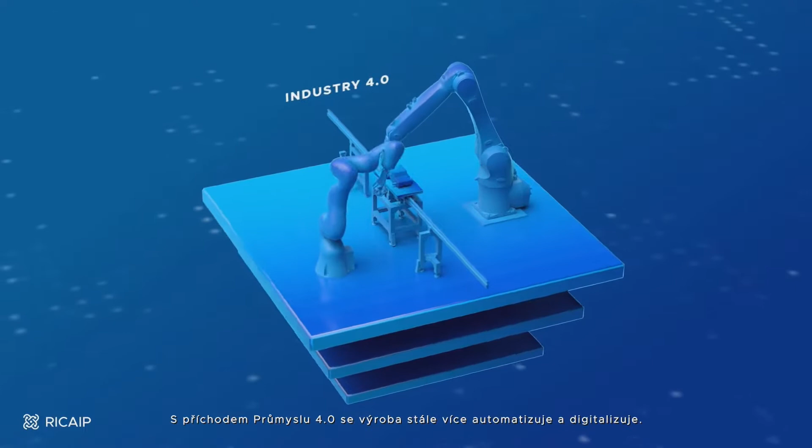The arrival of Industry 4.0 means production is becoming increasingly automated and digitalized. Although companies often have their own proprietary solutions, they're typically not standardized, so manufacturing continues to take place in independent and unconnected units of various size.

Two Czech and two German research institutes have joined forces in the creation of a project for new intelligent, secure, and sophisticated solutions for distributed manufacturing in the Industry 4.0 environment. The collective effort led to the establishment of RICAIP, the Research and Innovation Centre on Advanced Industrial Production.

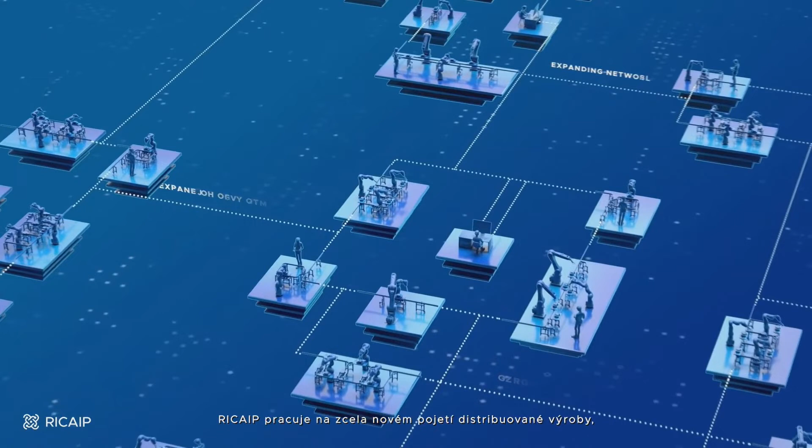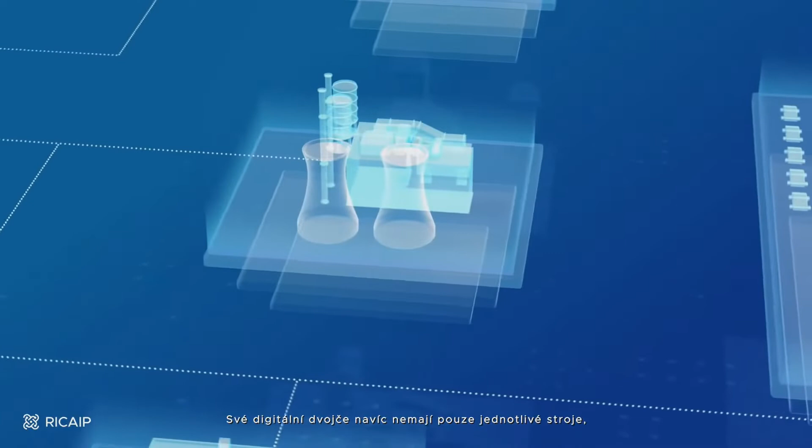RICAIP primarily focuses on developing an entirely new concept of multi-site production in which each machine has a digital twin that reflects its characteristics and communicates with other digital twins. Digital twins aren't used only for individual machines; entire manufacturing units and other entities involved in production can have them too.

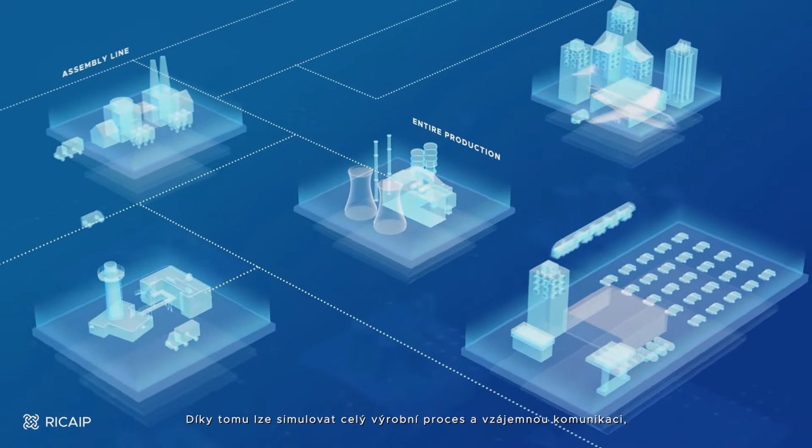This makes it possible to simulate the entire production process and reciprocal communication, thus significantly accelerating production preparation while eliminating the occurrence of errors. Thanks to artificial intelligence, manufacturing units are able to share knowledge with one another, and the system can optimize production and respond quickly to constantly changing environments.

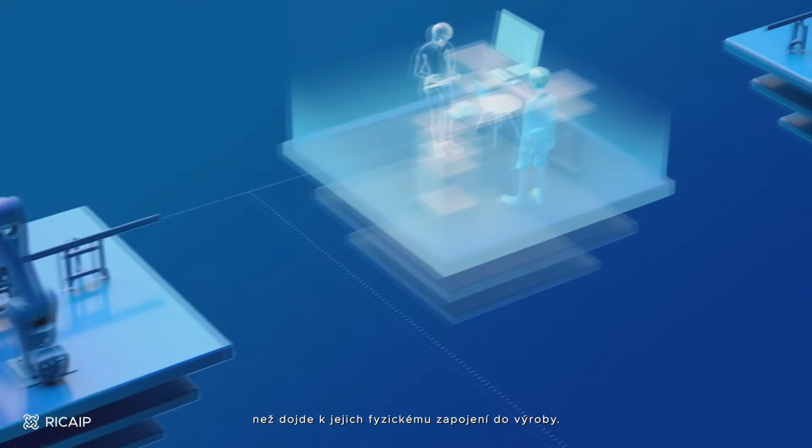Moreover, the combination of virtual reality and augmented reality allows additional virtual devices to be introduced to the production process and tested prior to their physical implementation on the shop floor. Likewise, potential new suppliers can enter the process, as well as the customer, who can configure the parameters of the required product and make other changes if necessary, even at the last minute.

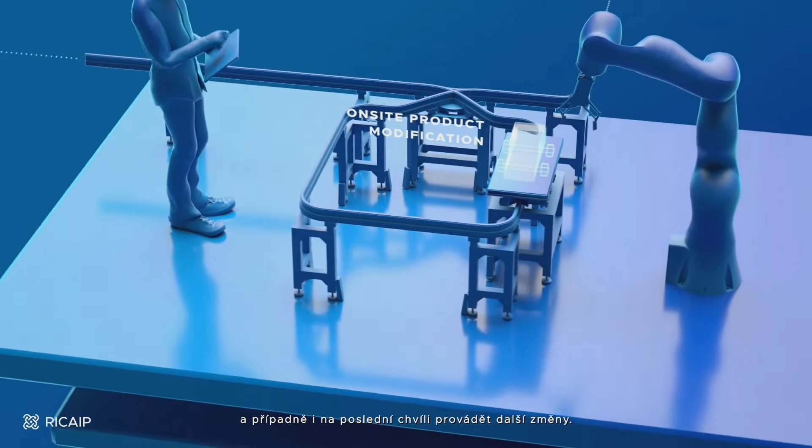These are the principles upon which future automated multi-site production networks will be built, and upon which they will accelerate the implementation of new manufacturing processes, reduce production costs, and make it easier for companies to enter the market and value chains.

Production as a service and shared resources: this is the future of industrial manufacturing.

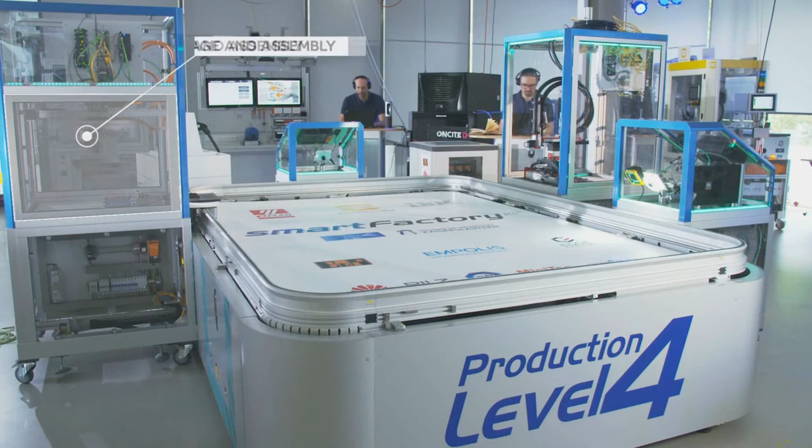The demonstrator features various production capabilities due to its modular design. We have included four new core elements in our system: a module exchange with automated release, adaptive AI methods based on deep neural networks, a Gaia-X connection, as well as a modern scalable system architecture.

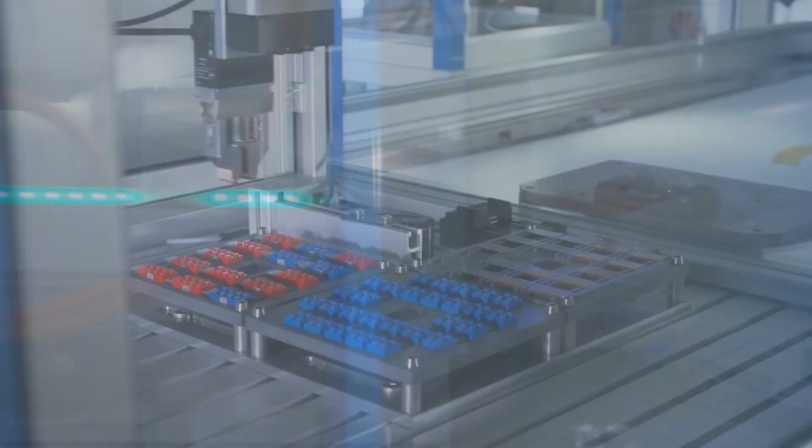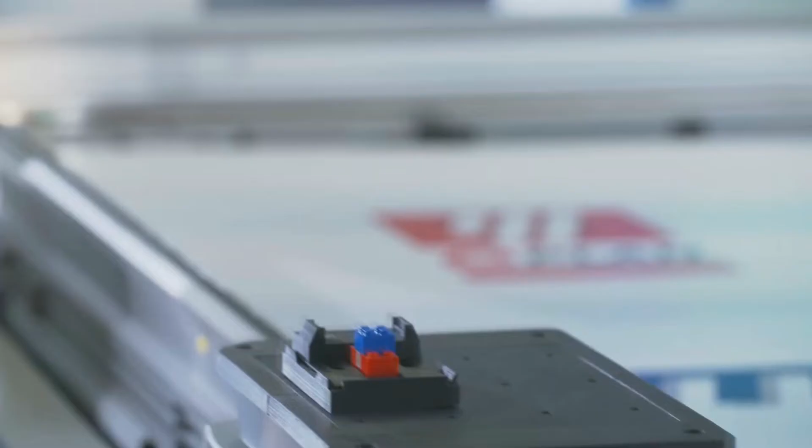We intentionally chose a simple product for the manufacturing process: a USB memory stick in the form of a studded brick that can be individually configured. The customer can select from various colors available. The brick is mounted as desired at the assembly station, then makes its way to the data entry station, where process and customer-related data is stored on it.

At the end of the line, the state of the final product is compared to the initial order using AI methods before the USB memory stick is output to the customer.

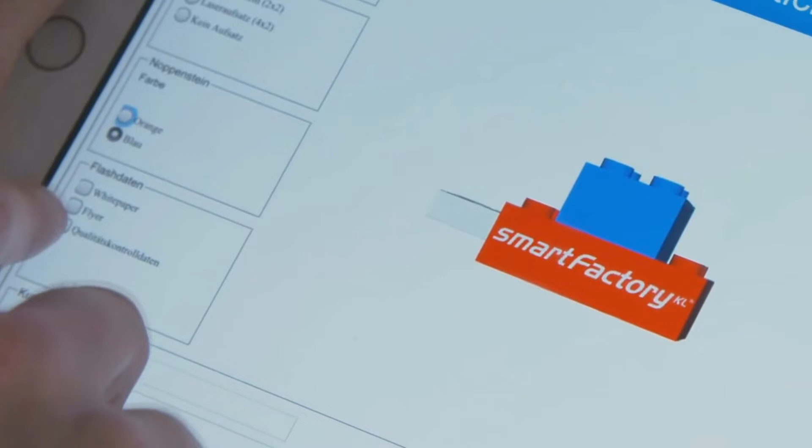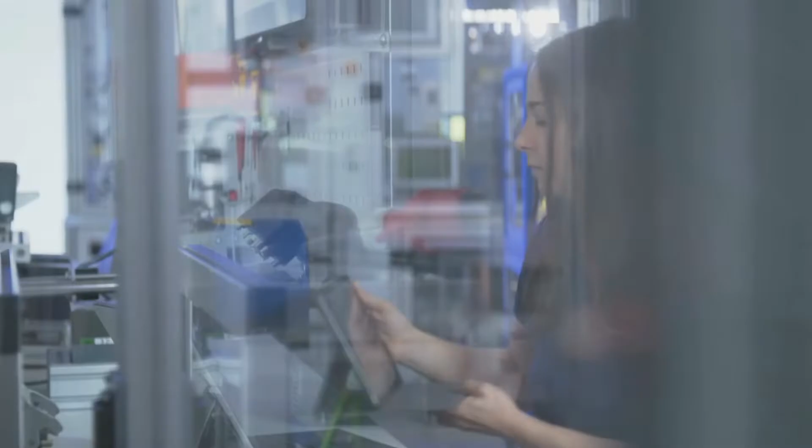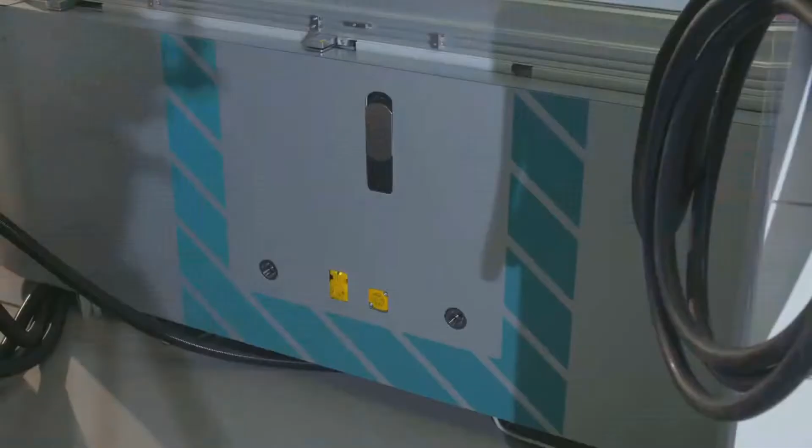An optional production photo is linked to the quality control data. This option requires a special module to be available in the system. A notice is displayed on the operator's tablet, and the operator gets instructions that this module must be installed in the plant. The tablet now displays detailed worker assistance that provides step-by-step guidance on how to proceed safely through the plug-and-produce process. Special positioning elements on the stations and plant system ensure proper alignment, while electromagnets guarantee stability and occupational safety.

Each work step must be manually confirmed before the process can continue. This helps to avoid safety issues.

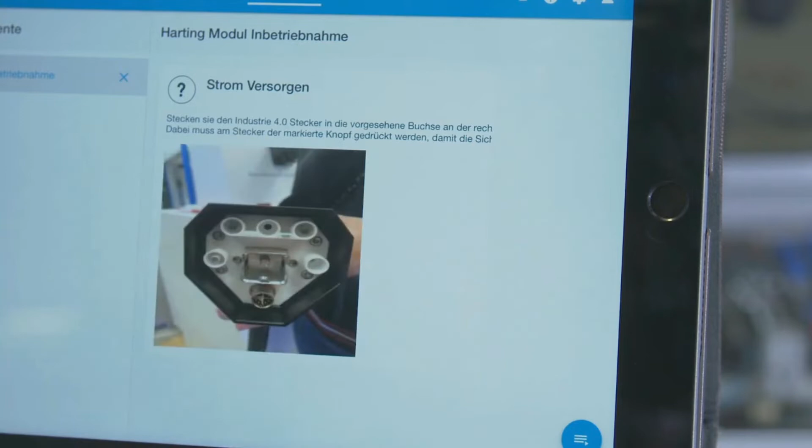An intelligent new connector was developed especially to meet the requirements of modular and autonomous production systems. In this form, it serves as a model for standardization.

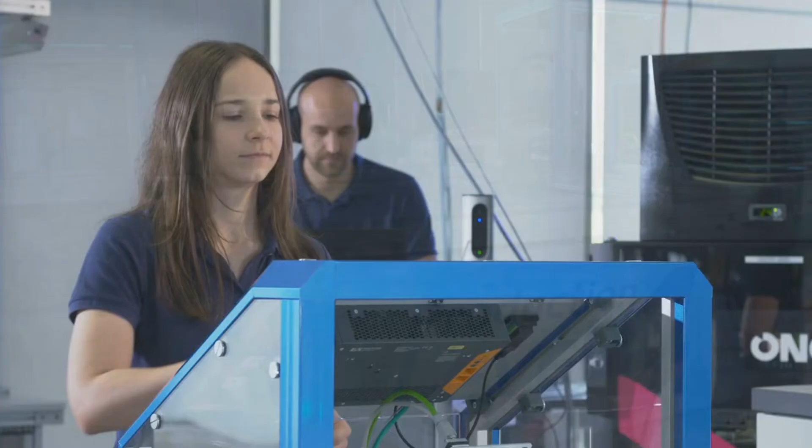Manual approvals lead the worker to a legally compliant plant operation. A certified and documented release is prepared at the end of each module exchange. The implemented security elements provide additional protection against unauthorized access.

The newly installed module enables the quality control and the related picture, which is later flashed on the USB memory stick.

The customer can also select options that require access to external suppliers. For example, we use the orange-colored studded bricks that can be ordered automatically via the European Gaia-X platform and delivered from the Netherlands. Via the Gaia-X node and connection, the production is triggered and the studded blocks are delivered and integrated into our system.

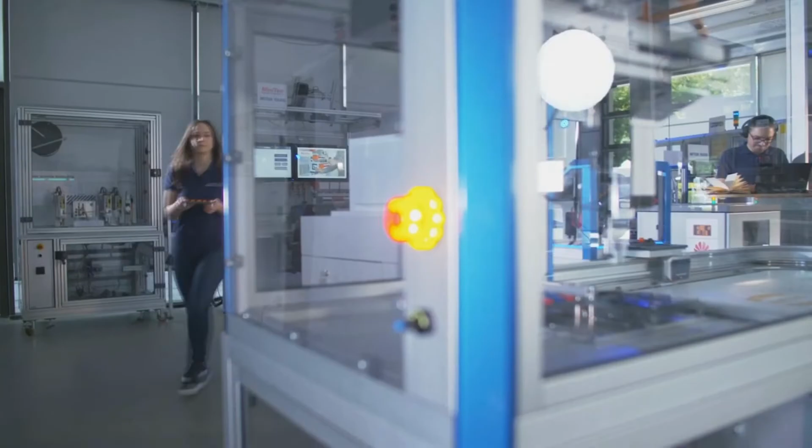On-site production is also possible, and the customer request can be fulfilled without a problem.

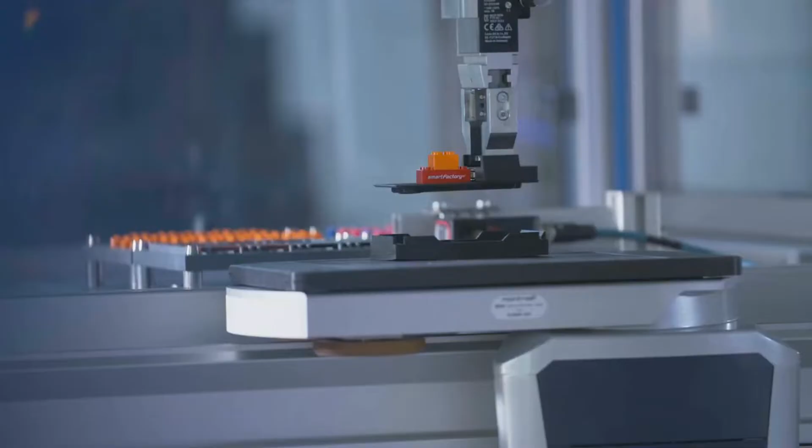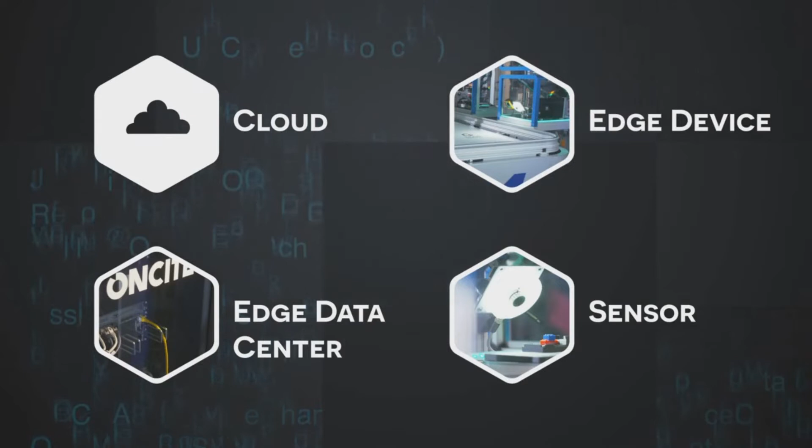Artificial intelligence is implemented throughout the plant. Why is this special? You can work at different levels: in the cloud, in an edge data center, directly on an edge device at the station, or directly on a sensor.

Another innovation is the skill-based system architecture. It manifests physical machine capabilities and product resources, as well as the higher-level software services for control, planning, and analysis in the factory environment. The automation pyramid transforms into a distributed network. Increased production flexibility is the result of agile expansion, made possible by the modular design.

Dr. Denner, the CEO of Bosch, clearly stated at the summit that only the combination of physical knowledge and digital data will drive the development of industrial artificial intelligence.

This is a great opportunity for Europe. Why? Because, of course, in the Czech Republic and in Germany, we have so many excellent engineers who have all this physical knowledge. And of course, we have to combine this with the AI data-based approach.

In the United States, this was also recognized in a new AI program launched by DARPA, which is called AI Next. Three waves of AI are included here, and the most recent one is not statistical learning, because this is now used and very successfully used, I must say, but they say also it should be combined with contextual reasoning.

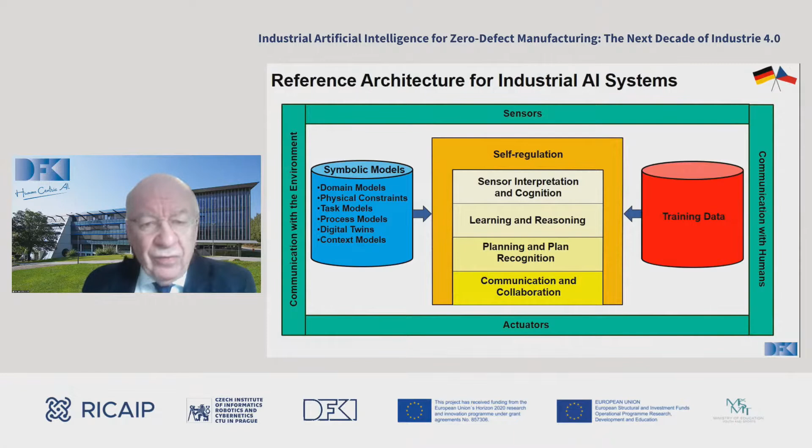On the other hand, the training data are also important. If we have excellent training data, which are annotated correctly and which have a high quality, then in combination we can ensure really a very good quality of the sensor interpretation, of the reasoning and learning, and the planning in the factory. So why do we want to combine machine learning and model-based inference?

These knowledge-free AI methods, like deep neural networks, which are very successful, we have to use them for visual analysis, for acoustic analysis, so the low-level sensory function of the brain and the cognitive apparatus of humans. These statistical methods can also be used to control search processes in model-based systems and thus make them much more efficient, or to learn the basic operators for model-based inference and planning procedures.

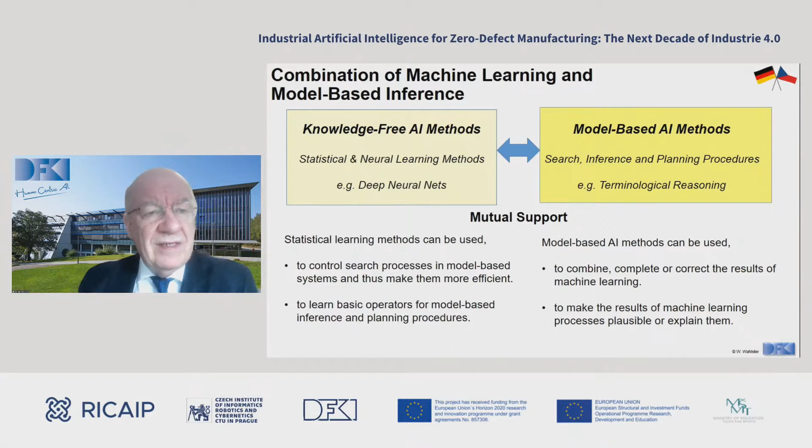On the other hand, we must use model-based AI methods to correct machine learning, because sometimes the machine learning results are wrong and they don't conform with physical knowledge. To make the results of machine learning also plausible or explainable, some models are also very important and useful. So we have this pendulum between symbolic and numeric.

We have very successful symbolic methods like multi-agent systems in the factory. You just saw this in the video. Use of knowledge graphs, constraint and SAT solvers, I will show in a minute. So many methods. On the other hand, of course, Bayesian networks, probabilistic logics, support vector machines, and reinforcement and deep learning are very important.

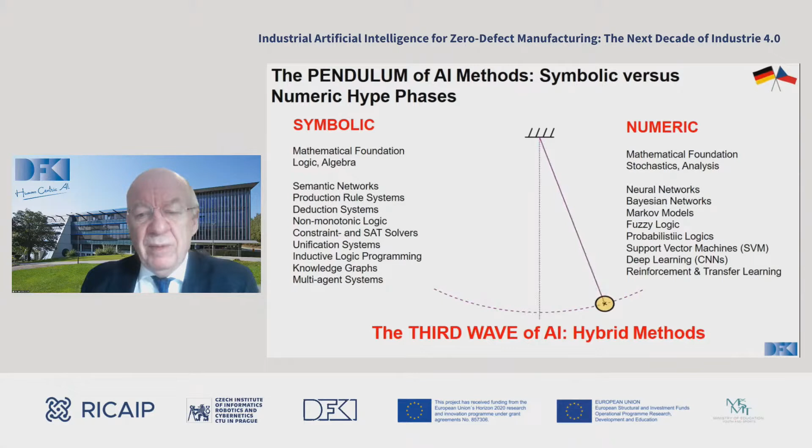And we discussed the next wave, how can we work together, and signed a contract. And we will have a new project, and this will be the technical part of my talk, namely AI-based quality management.

What does this mean? We want to achieve incremental real-time quality monitoring by a hybrid combination of statistical machine learning and symbolic models. And we want to generate alarms in the machining or assembly process as soon as we observe wrong actions by human workers or a robot, or a wrong interaction between humans or human and robots, or robot and robot in the factory. So one way to do this is hand tracking.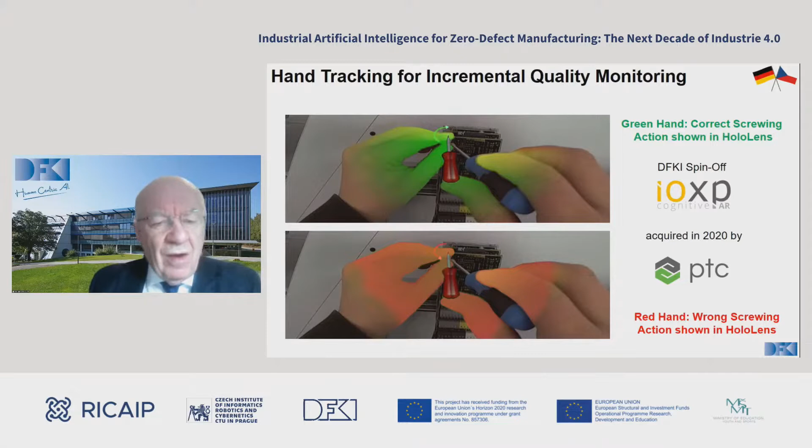We have now advanced methods for doing this. And if somebody does, for instance, a screwing act in the factory, we can show this person via the HoloLens that he is doing it the correct or incorrect way. This is a very primitive example of screwing in the wrong direction, but of course we have quite complex results when we go to augmented reality and use in the background such a checking process, whether what is done is correct or incorrect. And if not correct, then we also can show the worker how to do it correctly, if it was not a fatal error.

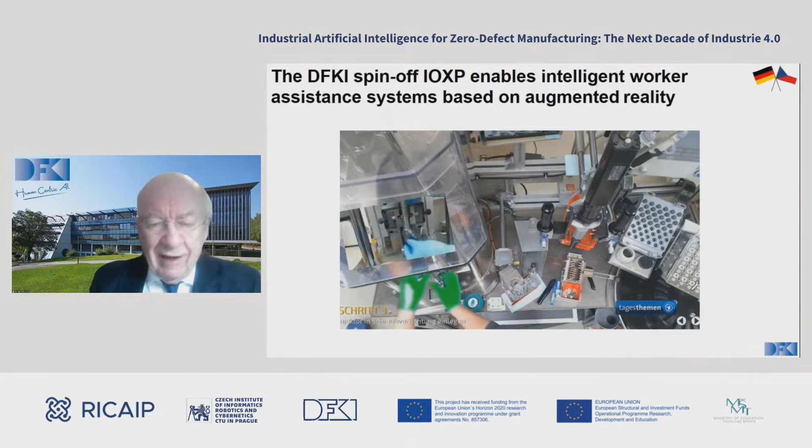We installed already such systems, for instance, at Bosch, as I will show in a minute. This idea was already used. I gave various talks about it in China in a production for motorbike motors. And what they do is very simple.

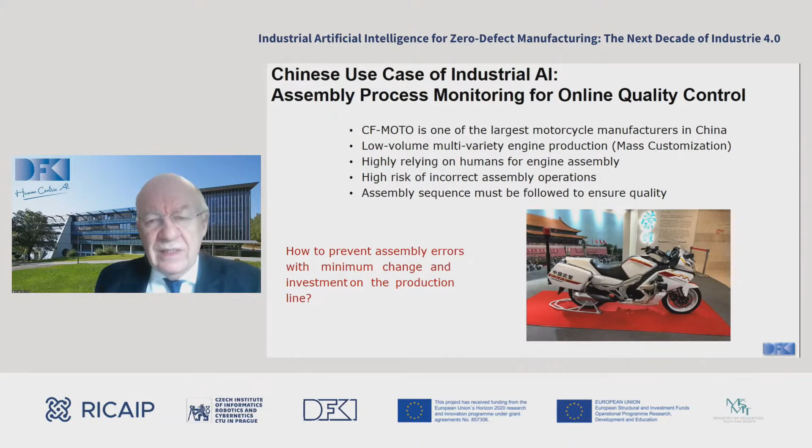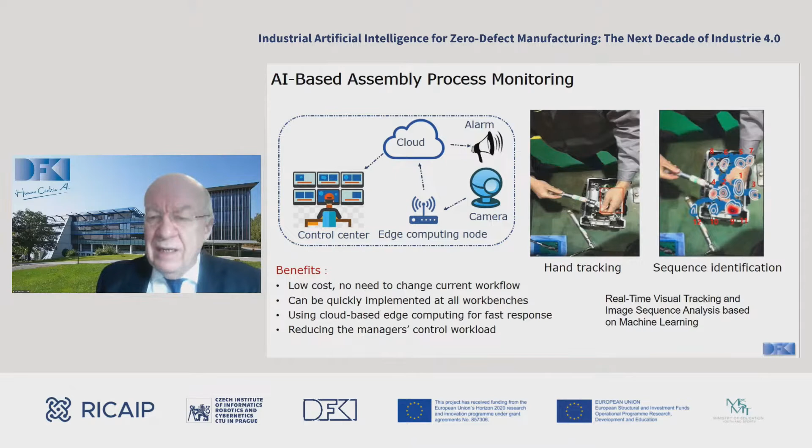They do this hand tracking, and then they do a sequence identification, again with visual tracking. So as soon as they detect that the worker has done something wrong, and this happens quite often if you have batch size 1 production, where a lot of variants are being produced, then this happens. And you are warned, and before the product is finished, it's immediately recognized and can be repaired on the spot.

In DFKI in Saarbrücken, Mr. Knoch, for his PhD thesis, together with Dr. Schwartz, worked also on this idea, but in a more advanced way, because there are various tracking tasks. So it's not only the screwing, but also, here you see, what kind of parts he is using, what screws he is using, what is the torque of the screwdriver, and so on.

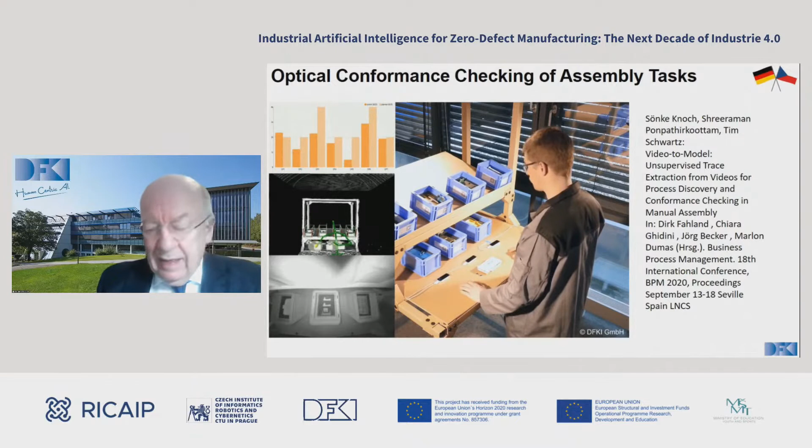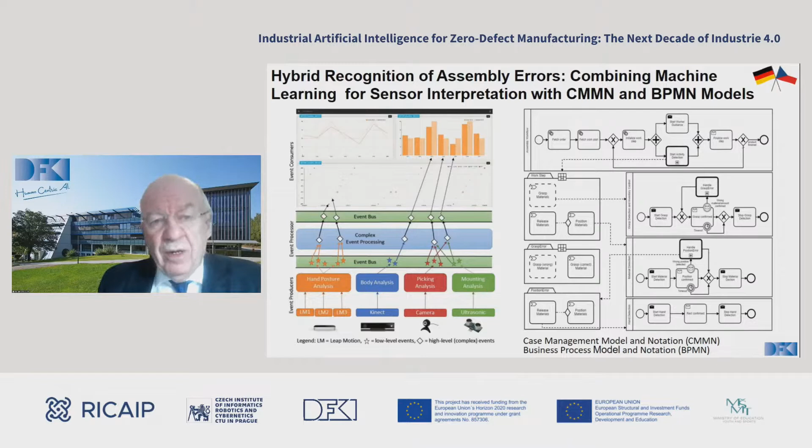This is compared internally to a model. We have a model of what really should be done, and this is a BPMN model and a CMMN model. I think you know these notions to formalize processes in the factory. In this task, for instance, there are some permutations allowed. And of course, the system allows, when it is checking the quality, also these permutations, but it uses the model as a constraint base and checks both the hand, the picking, the mounting, even with ultrasonic, and also the body analysis. That means the movement of the worker, and then can on the spot recognize any error immediately.

And we learned in our seminar with Volkswagen in Dresden that Volkswagen also does exactly this now in their new factory in Zwickau, because manual inspection is very expensive, is very hard to scale, and it's also error prone. They tried this in many factories, but in the long run, it doesn't work.

If you have automated stationary inspection, sometimes it's also very inflexible, because you want to check the product at many steps. So if it's stationary, it's not enough. It must be flexible and mobile. And also it's a little bit expensive.

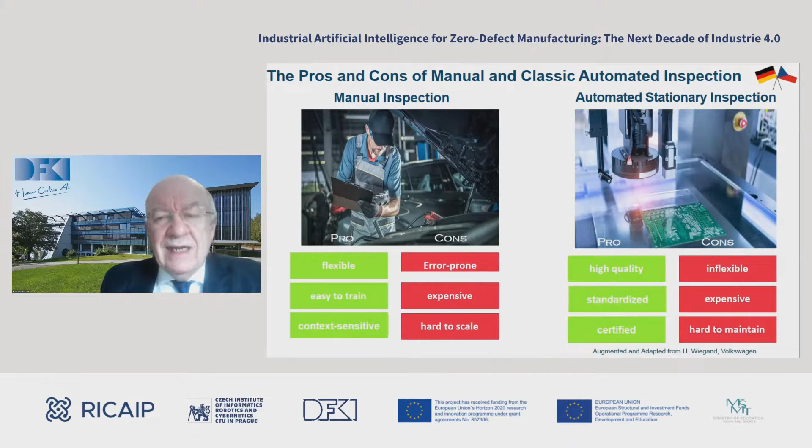So what they did at the Volkswagen factory in the research already is to have what they call a quality inspector robot, which is a mobile robot and can roam around and go to some of the important inspection points. He said that in car production, they have 800 different inspection points, and this robot goes around and checks them by visual inspection.

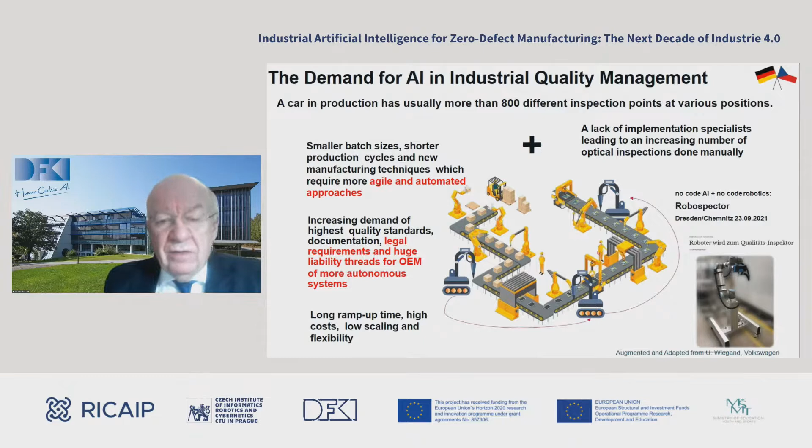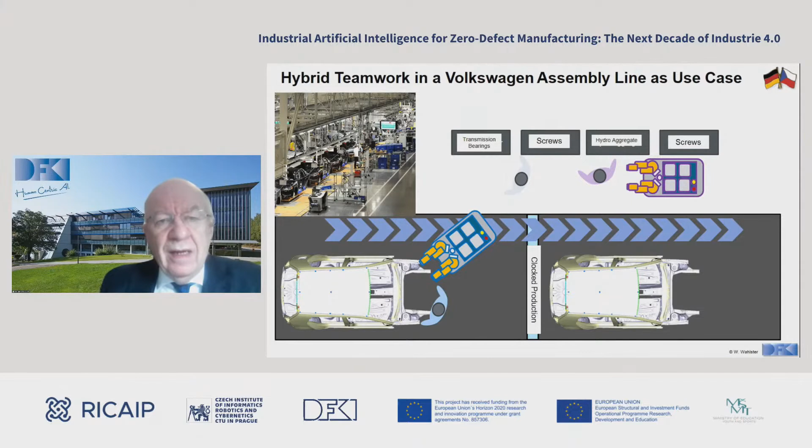At DFKI, we did cooperation with Volkswagen in Hanover and Wolfsburg. And there, in a factory, we also did this inspection with a mobile robot. And the new thing here was that even in mobile teamwork, the robot can move on the assembly floor.

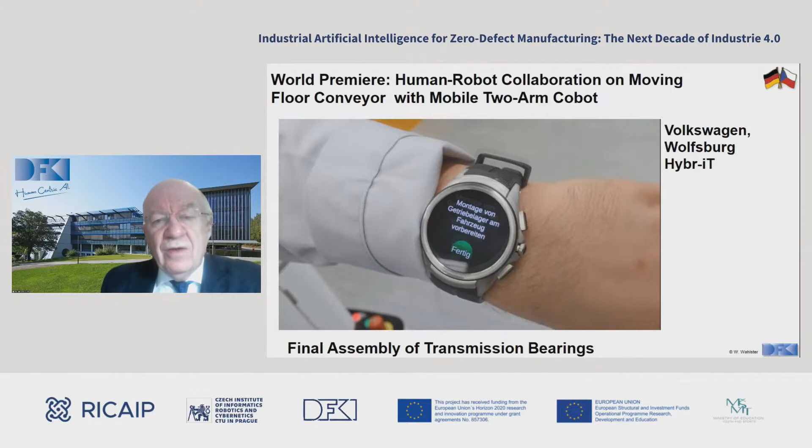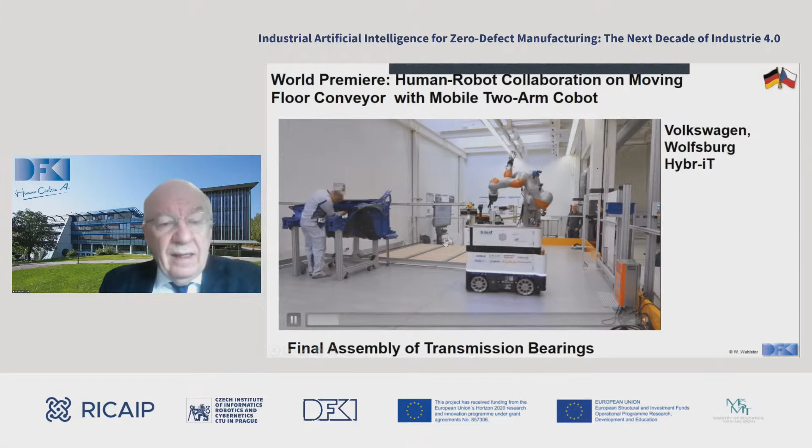So we installed a mobile robot, and this is shown here with a worker. You see the robot, it's a mobile one with 2 KUKA arms, and you also see that the robot is now entering the moving assembly part. Yeah, so this thing moves.

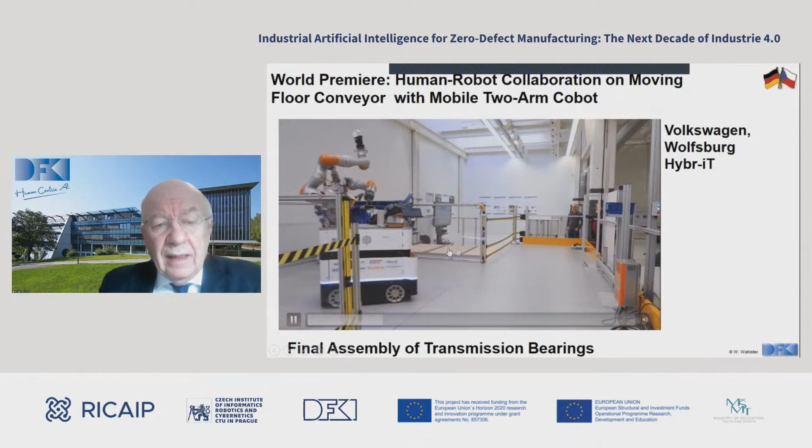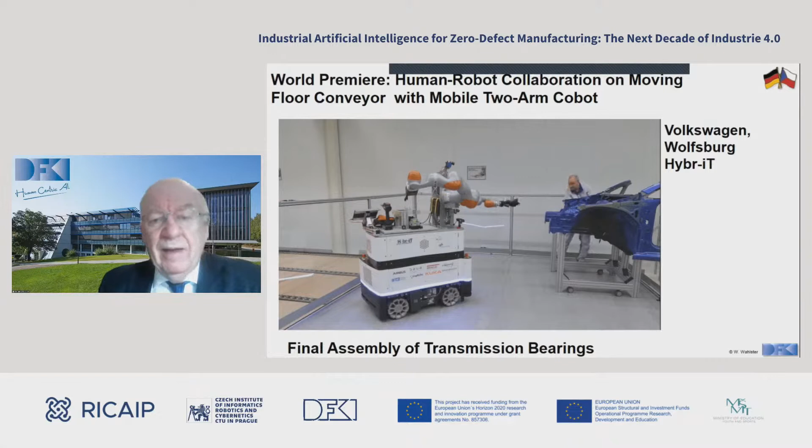Of course, this was still in the lab, but we did it also in the factory itself. So now it goes on this moving logistic belt, and the robot in parallel does 2 tasks and helps the worker to assemble the transmission bearings of a Volkswagen car. And what is interesting here is, again, from the quality control perspective, that every action these 2 robotic arms and the human do together is inspected, by comparing it with the task model, whether this is really correct, using the correct tools, using the correct product components, and doing the right thing.

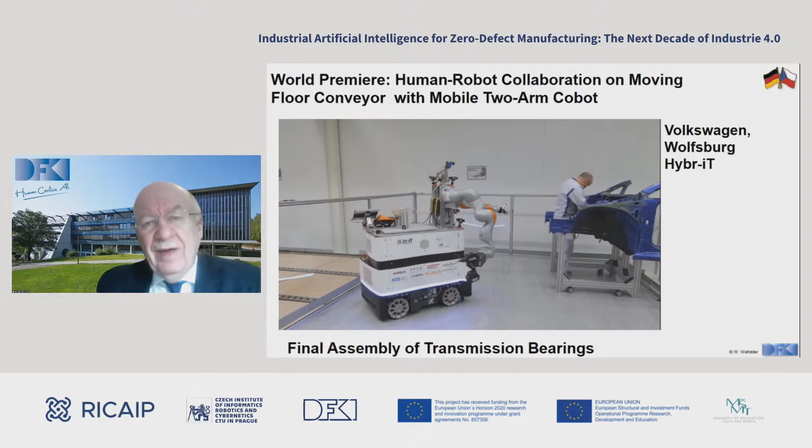Another very good motivation for a project like AIquama, AI-based quality management, is that if you do quality checking too late in the production chain, you may end up doing expensive steps which are unnecessary because the product quality is already so bad that it can't be used in the end.

Dr. Schwarz from the AI Competence Center of Skoda Auto gave a good example: there's a plasma coating process against corrosion of the motor, the most expensive step in the production line. But if you have a method to predict that a certain individual engine is already in such a bad quality state, you should not go on and do the expensive plasma treatment.

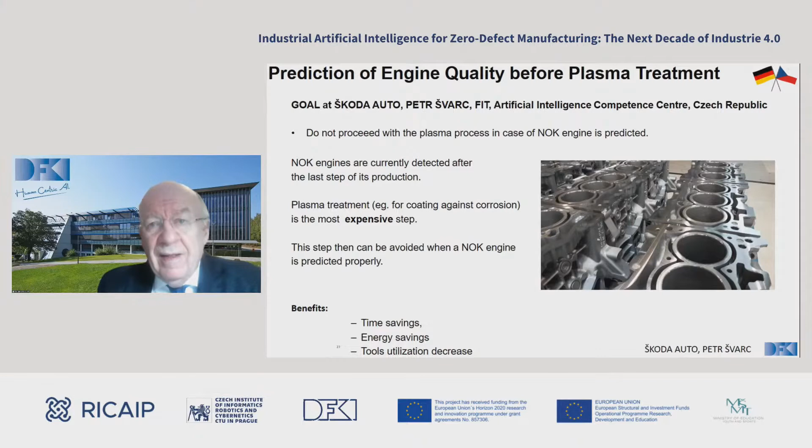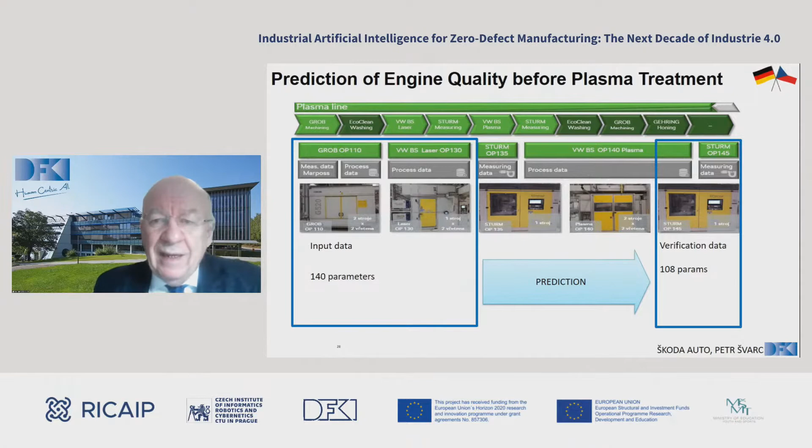Take it out of the line and finish it there. This saves not only time and energy, but also costs, and especially the tools which decrease after a while are saved. This is a great example of why incremental and online quality control by AI is very important. He showed it's possible by training a deep learning net to predict the final quality of the motor, and if the quality level is too low, you stop the plasma treatment before it begins, saving a lot of time and money.

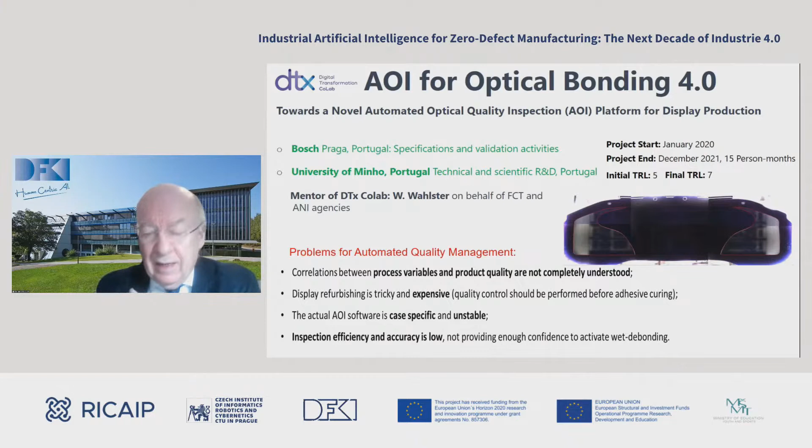A similar approach we found recently with Bosch and the University of Minho in Portugal, where I'm their mentor advising them in this direction. This is quality inspection for automatically produced displays for cars. Display manufacturing is a very expensive process, done in a clean room, but sometimes when you glue the parts together there are problems with the gluing, and bubbles appear when you track the emerging product visually.

We found the rejection efficiency is very high, 100% actually. Bubble detection is 95%. Experimenting with CNNs, convolutional neural networks, also gives very high results, but unfortunately there are sometimes false positives - the system sees a bubble on the display, but there's actually no bubble.

This is where we really need model-based insight, because when you think about how such a bubble can emerge, you'll also recognize that sometimes another object on the display cover may look like a bubble. So the system gives a false result - the neural network sees the shape, but the shape has emerged from another object.

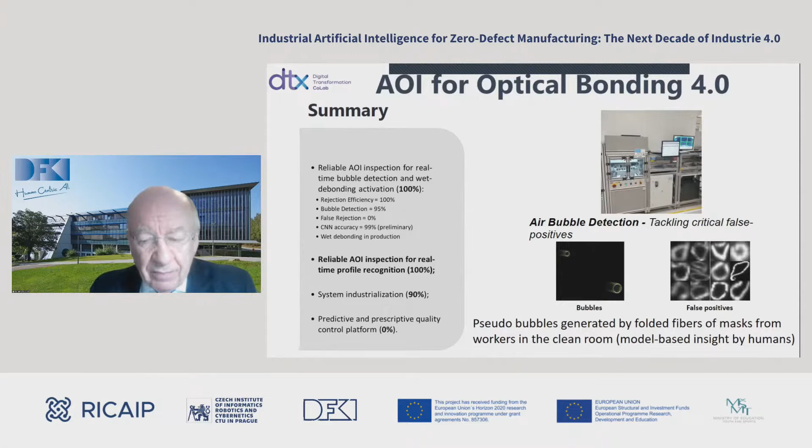We found, by modeling what's going on in the factory, that small folded fibers from the masks worn by workers in the clean room are sometimes causing this problem. Here you see such a small fiber expelled from a worker's mask - it's actually not a problem on the display. This is very bad if it's recognized by the CNN, because then you throw away a display worth maybe 100 euros already at this production stage, which we want to avoid.

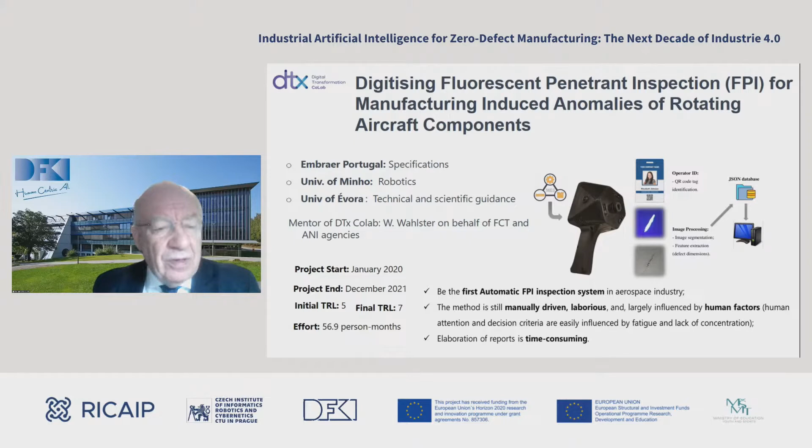Another good example is the use of AI methods for manufacturing induced anomalies in rotating aircraft components, again in cooperation with the DTx Colab. This was previously only done manually, and now, as at Volkswagen, we use a mobile robot to inspect along the wing and find problems with the material using trained neural networks. It uses, for instance, ultrasonic inspection, but also the well-known fluorescent penetrant inspection, in an incremental way.

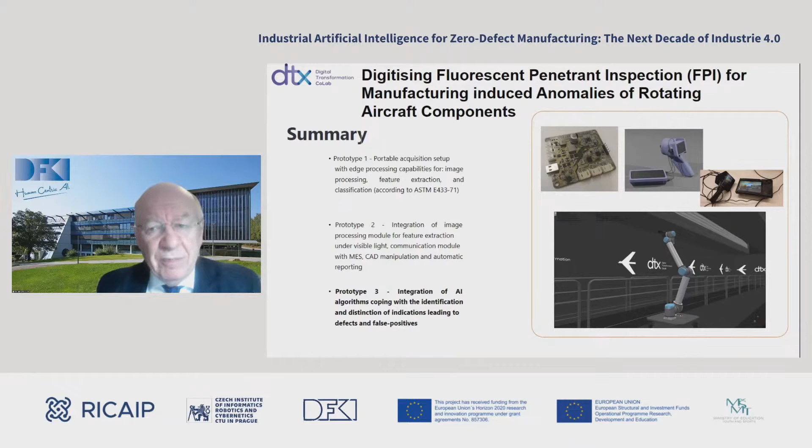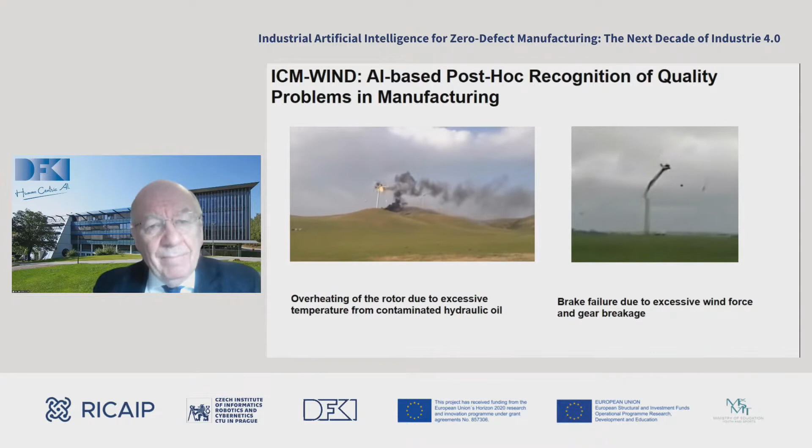Let me also point out - you may have seen videos of fatal accidents with windmills in Germany. This is a problem that sometimes leads really to disasters - burning windmills, parts flying around and even hurting people because of brake failure. We did a project at DFKI, Industrie 4.0 group, together with industrial partners on windmills.

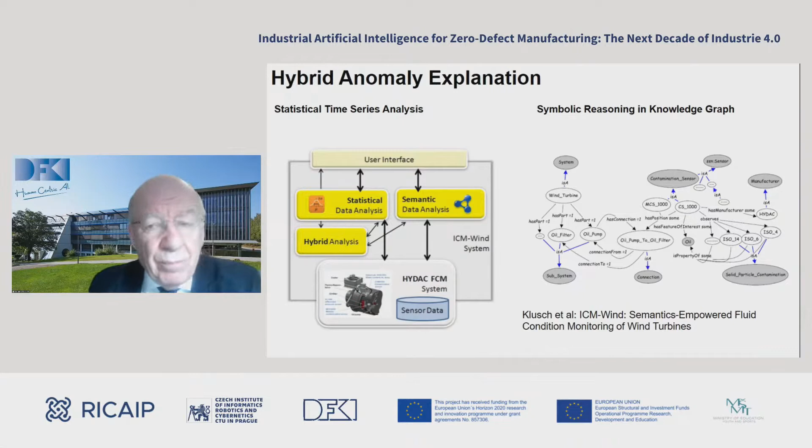We were able, by combining a semantic-empowered model of the wind turbine with neural network statistical data analysis of time series, using this hybrid analysis, to really find the cause of the quality problem at the windmill. We call it hybrid anomaly explanation. Unfortunately, this is post-hoc, after the accident, but then we have the evidence because we have a real model of the problem, which feeds back into improving the manufacturing process.

Let me give a last example where I can show that sometimes the complete model-based approach is also good, because then we have 100% verification.

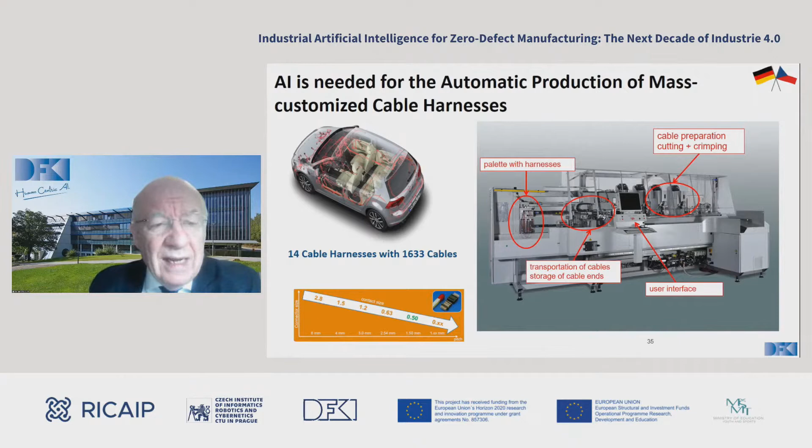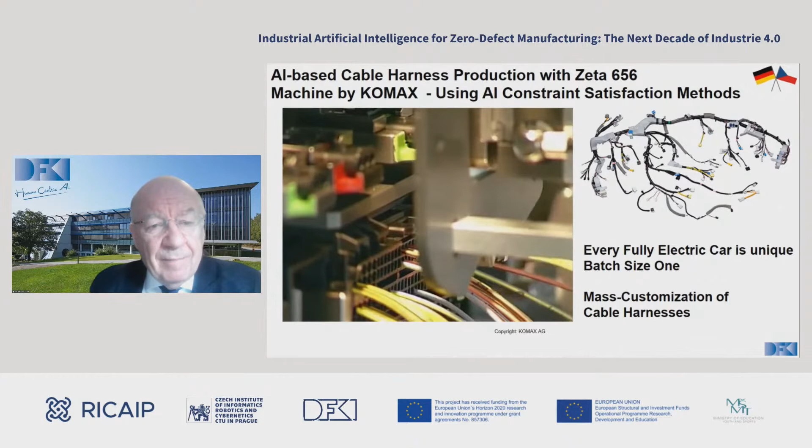This is a rare case, because in most cases these things are computationally too heavy. But for instance, in harness production in the cars, it works. At DFKI, Jana Köhler has shown that using constraint satisfaction methods makes it possible to fully automatically produce such harnesses, which are batch size 1, because many cars, due to so many variants, have their own harness. In the electrical car, this is very often the case. And this means that we want to do this automatically by a harness-making robot.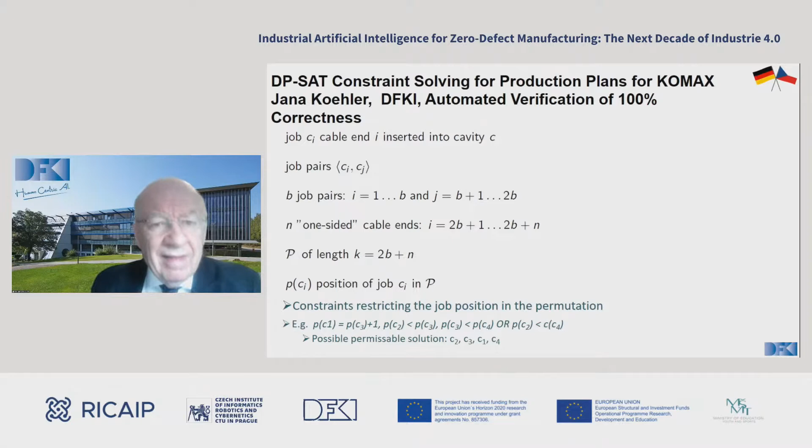But this problem can only be solved not by humans. It's too complex. They do this by hand, by trial and error, but instead by automatic constraint solving. Here one sees that sometimes when you formalize this as a constraint problem, which is quite a lot of solving equations with a SAT solver, it works. In the end, we have the proof that now we have a solution which is 100% correct.

So let me conclude. I think the combination of symbolic and numeric methods for online quality control is extremely important. We need it for object recognition, for motion tracking, the sensor fusion in the factory. We need, of course, the numeric methods mainly based on neural networks. On the other hand, we need digital twin reference models, action interpretation, and plan recognition, which, of course, can only be done in a symbolic way.

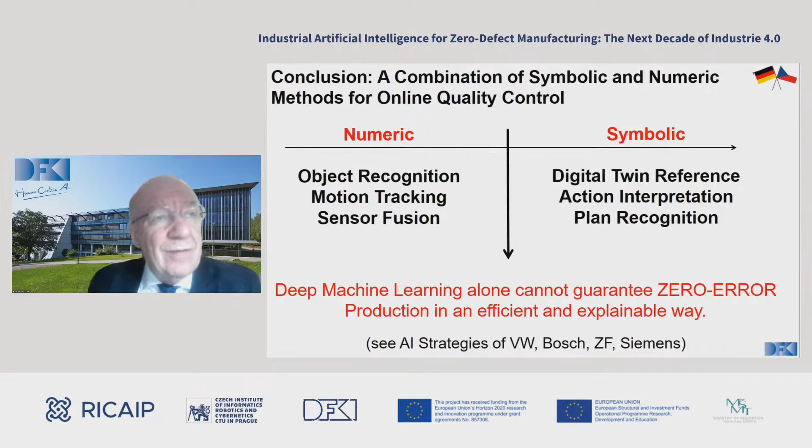So I must say, deep machine learning, although we have a hype now, cannot guarantee zero error, but we have to do the combination. And this is the strategy now at VW. We saw it also at Skoda, at Bosch, at ZF, at Siemens. So I think we have convinced the industry to go this way. And you saw the quotation from the CEO of Bosch.

So finally, I would say industrial AI is the key driver of the next decade of Czech-German collaboration on Industry 4.0. AI-based real-time quality management for achieving zero-defect production is the next successful application of AI in manufacturing after the wide deployment of predictive maintenance and real-time production planning. I think predictive maintenance everybody is using now, but the next wave, as I say here, is quality management, which is on a very mature level, so that we can now really deploy it in the smart factories.

And then, as I said, standardization and certification of explainable, robust, and trustworthy industrial AI solutions are the key to broad acceptance of industrial AI. Certification centers at CIIRC and DFKI are the next important steps. So we can do the certification for industry, and this could be a service which we offer to our industries in the respective countries. And finally, only the combined muscle of deep machine learning and model-based AI using constraint solving, terminological reasoning, and multi-agent systems leads to the next breakthroughs in Industry 4.0.

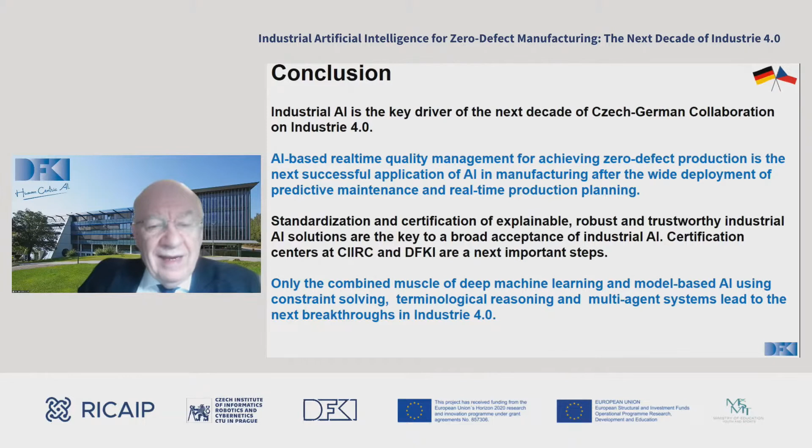So thank you very much for your attention, and sorry for the small technical problem. I hope you have enjoyed the rest of the presentation. Thank you very much.